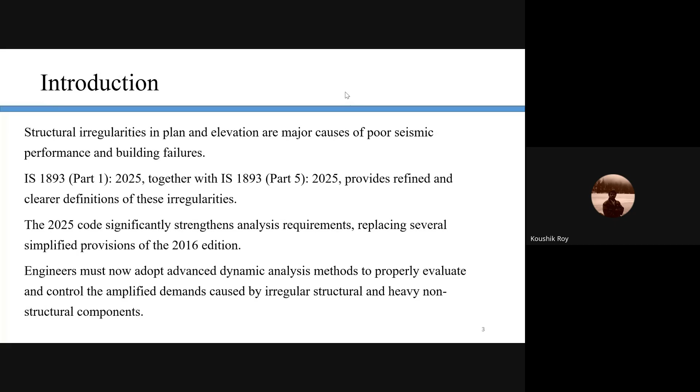But from top to bottom, if we consider the elevations, I just would like to know whether I am visible to all of you.

Some of you please confirm, because I'll be using some hand gestures that may also be relevant while I'm speaking. Dr. Rajana, you are visible? You are visible, my hand gesture is also visible, right? Yes, yes, yes. Okay, great, great. Thank you, thanks for confirming.

So this is it. We'll talk about this in detail in the next slides.

My opening remark was that IS 1893 Part 1 2025, together with IS 1893 Part 5, provides a refined and clearer definition of these irregularities. The recent 2025 code significantly strengthens the analysis requirements, replacing several simplified provisions of the 2016 version.

Since this is a faculty development program, I believe some of you are already involved in rigorous teaching of IS 1893, IS 13920, structural dynamics, or architectural design of structures. So if the 2002 or 2016 version of the code is already familiar to you, this lecture is a brief summary highlighting the recent changes, the reasons behind them, and their consequences for your final design.

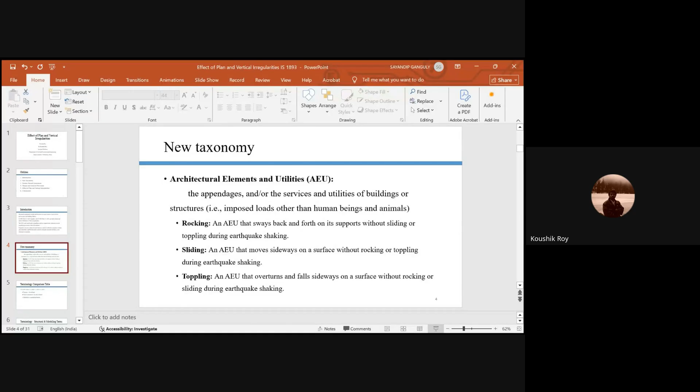Kaushikji, the slides are not visible. Sorry for the interruption. I don't know what happened, let me reshare it. Your presentation is starting. Yeah, it's now visible. Okay, I did not realize. Thank you very much. Please do let me know if there are any visual issues, sorry for the interruption, and audio issues at my end.

Okay, so this is architectural element and utilities. This is a term which comes up multiple times in the code.

The appendages are the services or utilities of a building or structure, that is the imposed load other than what is given by humans or other living beings walking, running, or whatever.

Rocking is one taxonomy. That is an architectural element and utility that sways back and forth on its support without sliding and toppling during earthquake shaking. Rocking is not a very new phenomenon, it's like the old wooden easy chair and how it actually works.

Although in structural engineering we don't deal with this terminology that much, whoever comes from a geotechnical background, this is a very common term to them in the context of lateral vibrations.

Then sliding - architectural elements and utilities that move sideways on a surface without rocking or toppling. Sliding, as the name suggests, is not a very big deal.

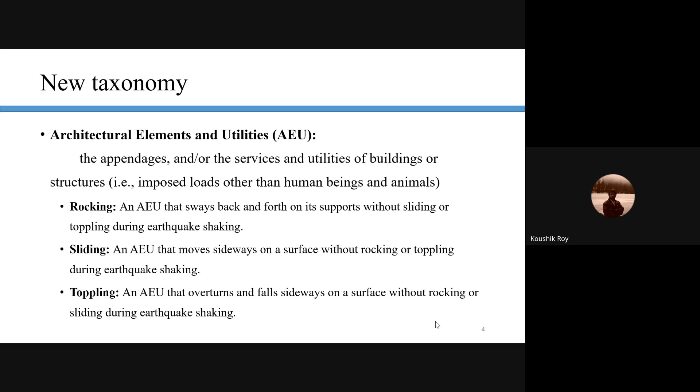These are shaking gestures, the shaking behavior a structure depicts under earthquake shaking. It can be either rocking or sliding. If there is no two, then it's toppling. Toppling is essentially failure, while rocking and sliding are still part of an analysis.

For terminology comparison, just note these things. The tick mark means this is there, but not defined properly. This is the sign I am going to use with it.

This is the sign that I'm going to use, which is present but not defined in detail.

Then the star symbol I'm going to use in the next slides - please keep this in mind, because rather than writing in remarks 'newly introduced' or 'not defined' and so on, that means it's been added. We call it addendum or corrigendum - something absent in the earlier version but present now.

There is also a formally defined term, which is in a very close form now. You can take the name and consider it strongly in the analysis.

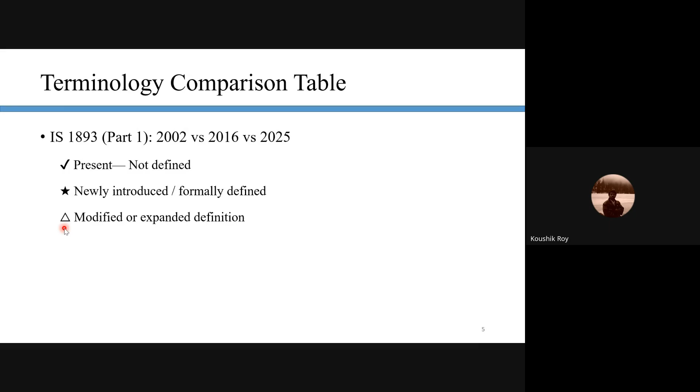Again, honestly speaking, in all these expanded and modified versions, I am still exploring. I am expecting some commentary from the proposed team members, in the form of commentary. So whatever I could unfold by going through the codal provisions, I'll only share that part. I may not be able to address all such concerns about what is modified and why it has been done.

So I was not a part of drafting these codal provisions. So it will take some time for me to learn this - it is just 2 weeks, and it usually takes a bit of time.

Anyway, that's why probably Dr. Rajaram has chosen this time frame. He can be one of the fast ones, where this kind of information is now being shared in the form of a faculty development program. You, Dr. Rajaram, isn't it?

Anyway, coming to the terminologies in detail, I have also kept the 2002 alongside. So bare frame and bare structures - what is bare frame. In the 2002 version it was kind of silent. In the 2016 version, the concept was there in the modeling, but it was more often dependent on the understanding of a designer or a designing firm.

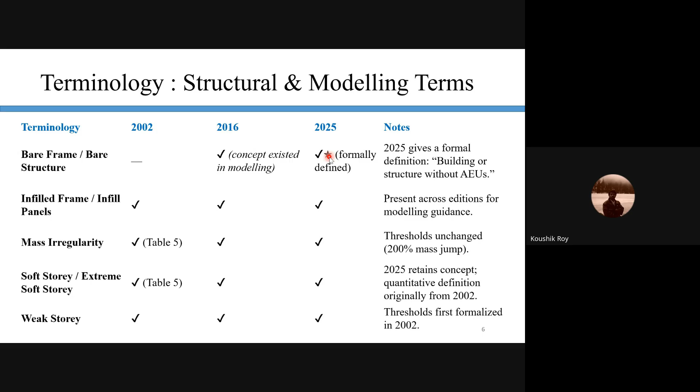Weak story - again this was there, this is there. Now soft story, weak story is very much related to your vertical irregularities. Then comes torsional irregularity.

Torsional irregularity, which would be available in table 4 - this again is the same. You probably know that we have a center of mass and the center of stiffness, and there's something called design accidental eccentricity, and something called design load. And based on that, a weak floor attracts more force, leading to high seismic demand in any structure.

Torsion is very dangerous actually. We follow a thumb rule, although it's not mentioned in the codal provisions. When we proof-check any building or structure, we try to check that the two principal directions of vibration are perpendicular to each other, and also that in the first two modes there shouldn't be any torsional mode. If there is a torsional mode, we need to revise our design so we don't get it in the first or second mode. From the third mode onwards, we usually allow a torsional mode, considering that the mass participation factor would not be very significant there.

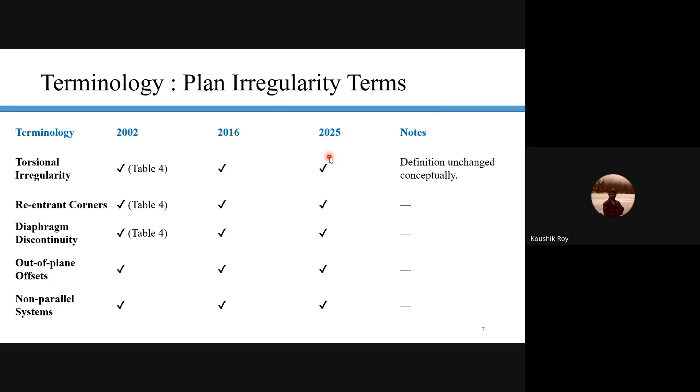Then coming to vertical geometrical irregularities, it remains the same - the threshold has been defined as 150%, 1.5 times, it remains unchanged. Then the in-plane discontinuity also remains unchanged. Then mass irregularities, that is kept the same.

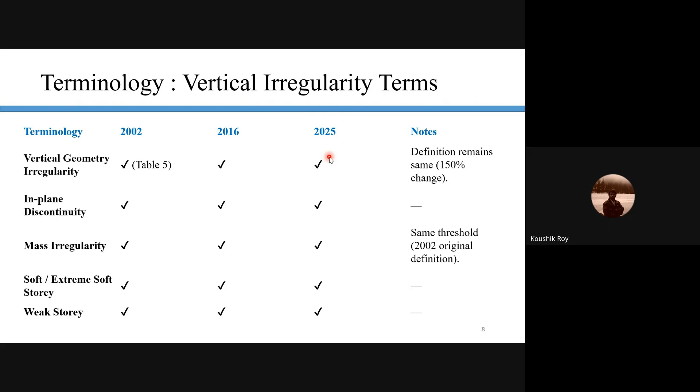Since the theme of the workshop is codal interpretations considering the recently revised codes, I thought let me make you familiar with different terminologies relevant to vertical and horizontal irregularities. So, done. Next is ground motion terminologies - mind this, so uniform hazard response spectrum.

Yeah, that is something very new. It's like next semester, as a part of our curriculum, we have earthquake resistant design of structures. So we are going to have a bit of a hard time decoding the code, which is just even not a month away for us being a teacher.

Anyway, uniform hazard response spectrum was already there in various standard textbooks and books on earthquake resistant design of structures or advanced RCC design, and it can be found in structural dynamics textbooks too. So this was not a very new terminology for us to calculate or analyze. However, the code was never very vocal on that part, even though we had been following it as part of our calculations. So for the first time they have acknowledged and introduced the uniform hazard response spectrum.

That is very important. And again, don't ask me what exactly uniform hazard spectrum is and how it is calculated. You are encouraged, you are requested to learn the terminologies on your own. It is already defined in the codes or any standard textbook.

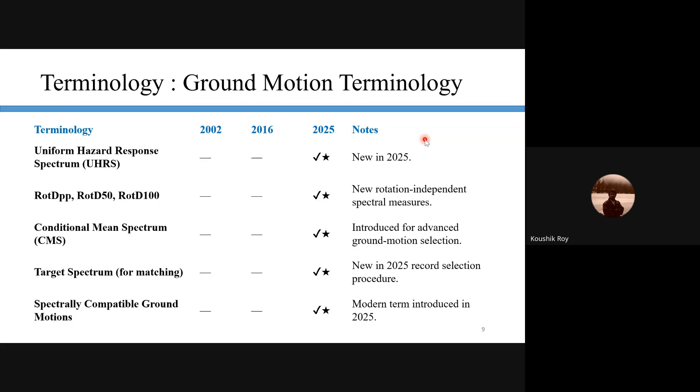This spectrally compatible ground motion is a new terminology, but I wouldn't say it wasn't there before. In research we had been considering that. But this is something new in the name of terminology in the code. I believe this spectrally compatible ground motion may not change much of the outcome, but I'm not sure. I haven't used these provisions yet in my design so far.

Coming to a few more terminologies, you may think the professor is teaching so many terms. I'm only focusing on those which are new, and within an hour or an hour fifteen, or say an hour thirty minutes, I won't be able to give detailed description on each part. That's why I'm just motivating you on what they are and why they've been introduced. Please excuse me on this.

In modal analysis, you had modal analysis earlier as well, but now a generalized coordinate and generalized concept of generalized mass have been introduced, and that has to be incorporated while doing the modal analysis. This was there in the beginning for modal analysis, but now it's been introduced formally.

Next is missing mass corrections. Missing mass correction was there - I don't remember if it was in 2002, but the 2016 version talked about it. However, it was not at all transparent or clear how to use it, or indeed whether you needed to use it. Now the 2025 version is very clear about imposing this correction factor considering the missing mass.

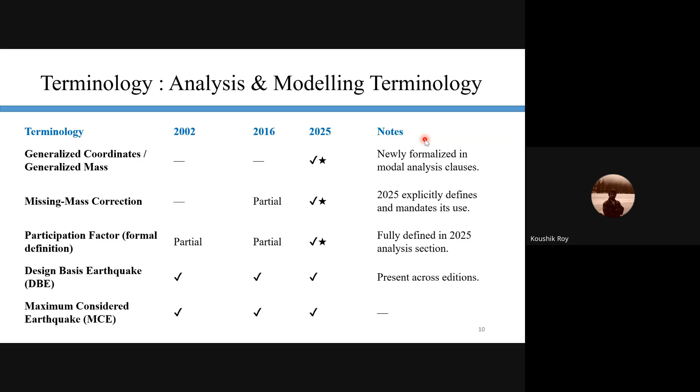Design basis earthquake was already there earlier, it is there, it will be there. Maximum considered earthquake - it is there, it will be there, it was already there.

Architectural elements and utilities are very basic terminologies I need to use multiple times in this context. AEU comprises three major categories. They have given a different classification for architectural elements and utilities. Earlier, this terminology was not at all there in the code. Now they have introduced this code, defined it, and their utilization is also very much defined.

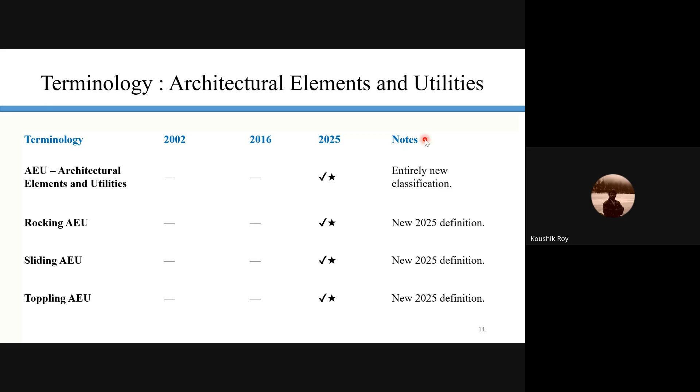Next is rocking - this is newly defined in the 2025 version. Next is sliding - earlier it was not there, but now it is. I have already discussed that. Toppling of AEU was again not there, but now it is. So these are the four newly introduced terminologies, along with their formal definitions and user guidance, which you cannot bypass while designing a structure.

Without this, any session today, even I'm not sure about the next presentations - Professor Pradeep Kumar, Professor Raghukant - any presentation or seminar in this FDP would be kind of not complete, I would say. So I mean, do I need to mention anything on that part, because this is not really relevant to my actual theme in this context.

But I just wanted to show you how differently things have changed. One important part to note - Delhi and Jaipur are now taken into zone 4, and that's notable because Delhi and Jaipur used to be in two different zones. Jaipur used to be at zone 2, whereas Delhi used to be at zone 4. Now, Delhi and Jaipur are in the same zone 4.

So whoever is coming from Jaipur, or if this is your area of interest - there are certain zones which got promoted not by one grade, but by more than two grades sometimes. Earlier, Darjeeling and Alipurduar used to be in zone 4. Now everything has been blanket kept in zone 6. So there is a promotion from zone 4 to zone 6 in various contexts.

And if you see the map, for the seismic hazard analysis, they told that it's a probabilistic seismic hazard line. Just note that it doesn't look like that - actually they bent that line in a way so they could cover Delhi and Jaipur together.

How many of you feel so? Isn't it - there are certain regions where decisions are not always technical. My professors used to say at IIT Roorkee that there are certain regions which are political as well. So they always wanted to put Delhi and NCR in the very highly seismic or high risk zone. Anyway, that is not aligned with my theme of this presentation. I just wanted to show you this, although my previous speakers and future speakers succeeding me today or next day will probably come up with this slide to discuss more on this part. But again, this is not my part to speak on.

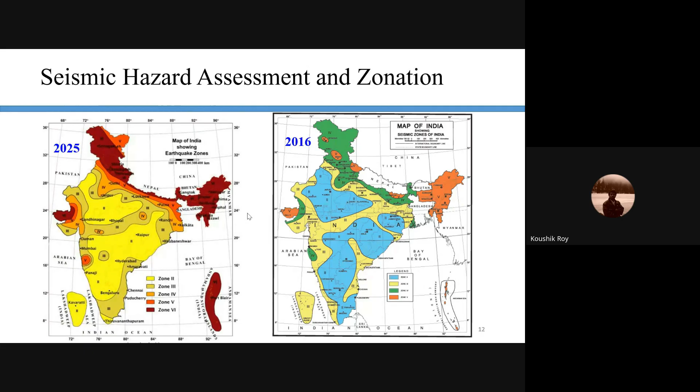In fact, all major cities are now coming into this highly seismic zone - be it Shimla, Dehradun, Roorkee, Chandigarh - everything is now coming under this region. Earlier this was not the case; we had a certain level where we were using zone 4 at the time.

Anyway, moving to the next - zone boundaries. As I was telling, it has been adopted as a higher-risk zone if there is any boundary of the city.

Return periods actually specify the design horizontal acceleration coefficients for each earthquake zone corresponding to different return periods. Zone 2 now corresponds to 2475 years of return period. We follow a Poisson distribution in this context, so I'm not going into 10% probability of exceedance, 2% probability of exceedance, and so on.

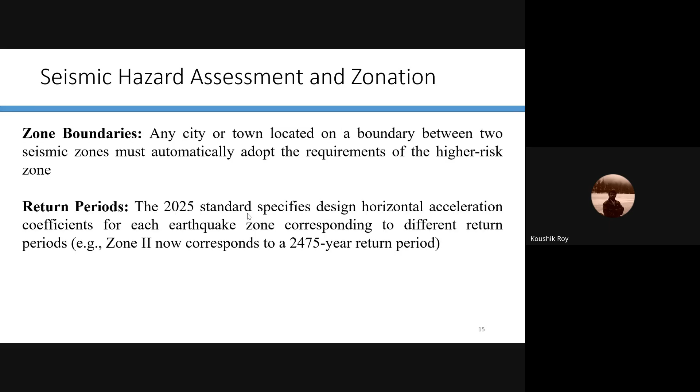This concept you already know, in 50 years that means 475, 2475. If there is a 2% probability of exceedance or 10% probability of exceedance, then it will correspond to different return periods - following Poisson's distribution.

Code structures, this newly devised one, are divided into different segments. Specific building provisions are also given in detail in the newly revised standards. Non-structural safety components are also introduced.

The major focus was given to non-structural components - be it facades, false ceilings, parapet walls, isolation walls, separation walls, water tanks. Special emphasis has been given to this.

So this has to be considered and anchored if the weight of all such non-structural components exceeds 1% of the entire floor load.

I'm still confused whether the floor load includes the dead load of the floor or not. Probably not, but this is still not clear to me, honestly speaking, so I cannot give clarity on the matter - whether it excludes or includes the dead load of the floor. That's why I've highlighted this part in blue, because I need to explore it more.

As I told you, I really did not get much time - it's not my fault, because the code only got revised a couple of weeks back. I'm still waiting for more observations from other experts. When I present next time, after a couple of months, I will try to enrich myself enough to address all such concerns and connect all the missing links I'm still struggling to find, with good explanations.

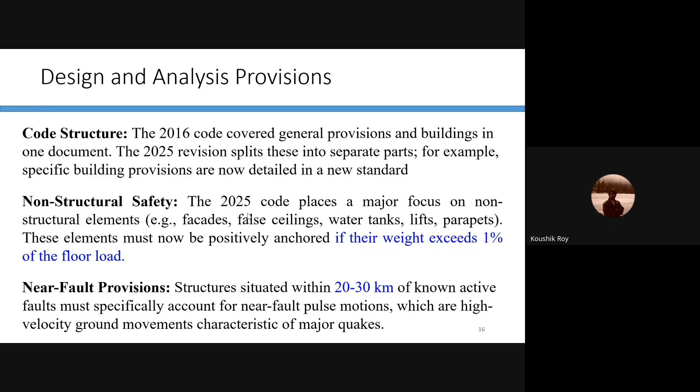Soil considerations. In case of soil considerations, see, I'm a structural engineer although I work on soil structure interactions. As I see the panel already, Dr. Mohanty will be there from IIT BHU to talk on the liquefaction part. Liquefaction was already introduced in this structure in the earlier 2016 code, but believe me, that was very hazy. There's a lot of equations, and even the units are very different—foot per second square, meter square, pound per feet square, kilometer per meter square—all the units. There are a lot of confusions actually.

I remember when I was teaching this for the first time as part of my course, seismic design of structures, in 2022 sometime during the lockdown, I also felt these hardships while teaching that part. Now I believe these new codal provisions have made it more detailed. As I told you, these codal provisions are a bit complicated to follow than the earlier versions, because this is no more a very simplified one, unless you have an expertise on structural dynamics.

Some of the provisions, some of the clauses, are really hard to follow. I mean, again, my opinion, but I believe that will be the opinion of others as well. So before following this code, if you have a good understanding of what is soil flexibility, what is its contribution in structural vibrations, what is liquefaction phenomena, and all the technical terminologies associated with that, if you are familiar with them, then you would not face much hard time to follow these codal provisions. Anyway, soil condition was already there.

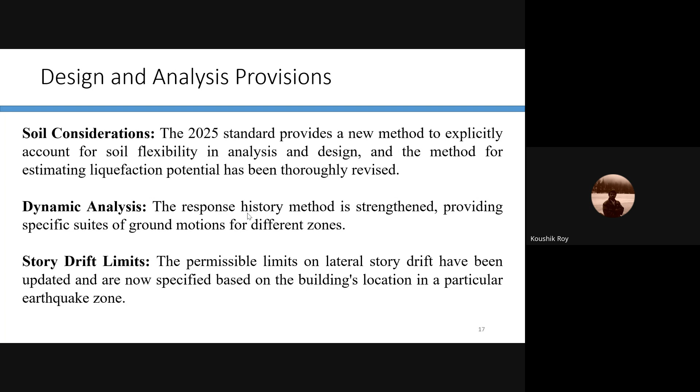On story drift, earlier it was very blanket, but now for every zone the limit has been defined. The maximum elastic value from elastic analysis was given as 0.4% of the story height, which can be used as the minimum specified design lateral force.

Now it is very much zone dependent and has been made more conservative, more strict. If you are more strict on the story drift part, your sections need to be much higher to meet the seismic demand. Your structure would experience more inelastic demand, more ductile demand, so to compensate you may come up with higher sections and higher reinforcement, adding a heavy load from the economical point of view.

In fact, that is probably one of the reasons.

My slides are visible, Dr. Rajaram? Yes sir, it is visible. Okay, thank you. I just wanted to check.

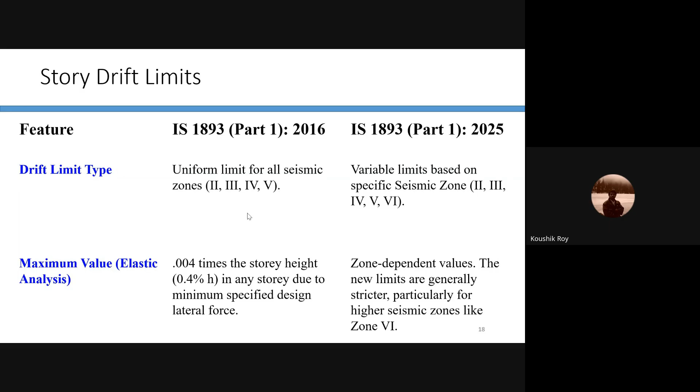Since it is now zone dependent, it will put some pressure on the economy, so that is one of the reasons. I'm not sure whether this can be on record, but I heard that the industry put a lot of pressure to make it simpler or less strict. Anyway, I'm happy to see that our voices were considered.

Coming to the applicability point of view, the 2016 version was generally applied to all regular structures. However, in this part non-structural component safety has been focused on, with a strict limit on irregularities and specific non-structural components.

Sometimes a structure may not be that vulnerable, your structure may be sound and safe, but irregular installations like water tanks, heavy machineries, or a mumty room can be a problem. A 1,000 liter water tank is a very heavy load on top, and you can imagine what kind of eccentricity it creates during a seismic event. Even facades may look like lighter structures, but heavy machinery installations like a mumty room on top of a lift well, or AC control units, are all part of this.

So all these are non-structural components, and a lot of architectural things are actually considered into account now.

I'm happy that at least now we can show our architects these provisions we need to follow, and we cannot do anything about that. Otherwise, the fight between the structural and architectural engineer was inevitable, and we were kind of helpless because of their beautiful presentations, and clients were happy with them, while we structural engineers had to convince the client multiple times about what is safe and what is not, and we were struggling.

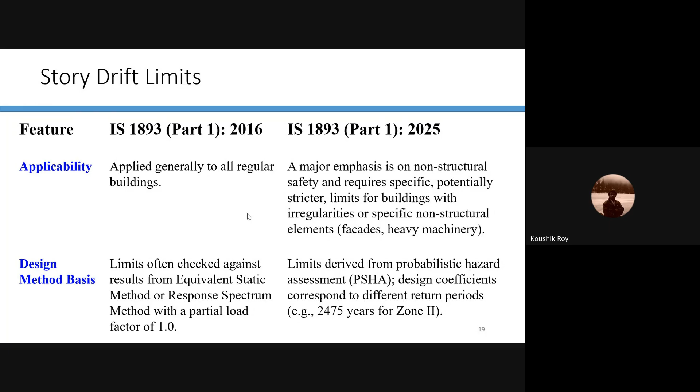Design method basis: in the response spectrum method, we were not using much of the partial load factor, which is one. Instead, limits derived from probabilistic hazard assessments have been introduced, with coefficients proposed for different return periods of an earthquake. So design methods also got changed.

This is something I'm actually talking about. You have a center of mass, CM, and center of stiffness, CS. We also call it center of resistance, or CR, in codal provisions and some books. So your inertia force during a seismic event or any lateral load acts through the center of mass, because it's m times x double dot. So wherever there is mass, the x double dot will act at that location as the center of mass.

However, the structure has static load resistance capacity, and we know the source of that resistance comes from the stiffness of the structure, because during our BTech time, we established the relation between stiffness and force to come up with deflection. That's it. In this case also, the center of stiffness is the center of resistance of the structure.

If the load is acting through the center of mass, and the resistance is acting at the center of stiffness, then the typical rotation would be somewhere in between. So what happens? There will be some torsional force, torsional moments, and because of these torsional moments, the weaker sections, due to high rotations, would end up having high seismic demand, leading to high seismic loads in each of the structural components, and your seismic demand is going to increase a lot.

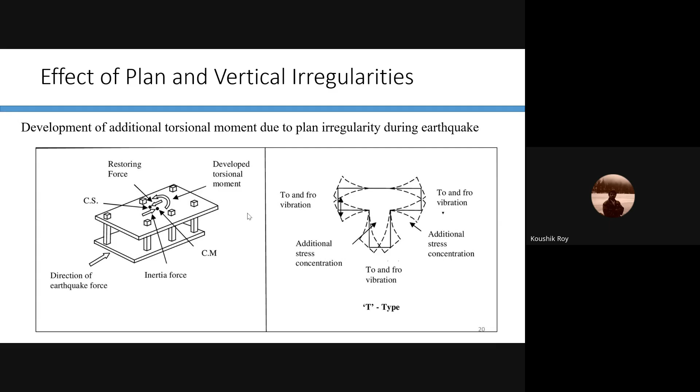But here, because of these to-and-fro vibrations, different components will vibrate in a different manner, ending up creating some hot spots of failure. So where the failure would be, the structure will be more vulnerable.

Additional stresses develop in buildings having plan irregularities during earthquakes, so some stress concentration. If there is an L-shaped structure, then because of the to-and-fro vibrations, the corner will have more stress concentration, as you already know.

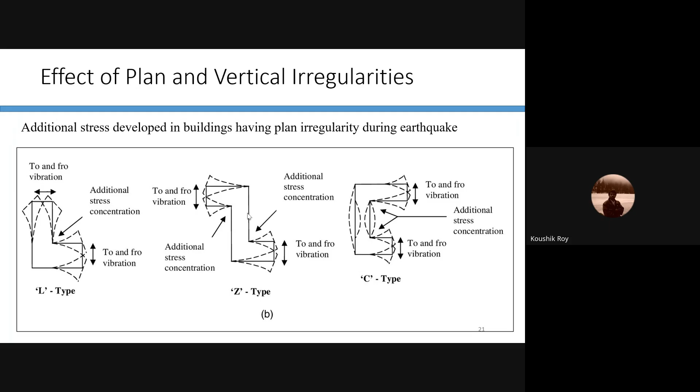In case of Z-type structures, and also in case of C-type structures, this is the mode of vibration, and there will be additional stress concentrations resulting in seismic demand at its corners. That's all about the horizontal irregularities.

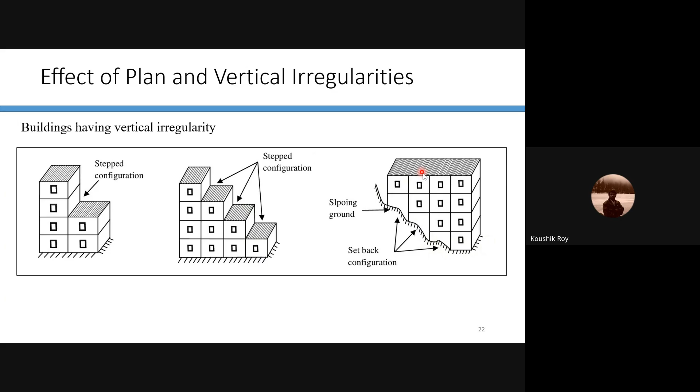Vertical irregularities in buildings arise due to variations in story stiffness. This is quite common, not very new - it was there in the 2002 code version as well, during our student life, so we had been learning these things. The story stiffness cannot be less than 80% of its neighboring floor's stiffness, adjacent to that floor. So yeah, this is something we need to consider regarding vertical irregularities.

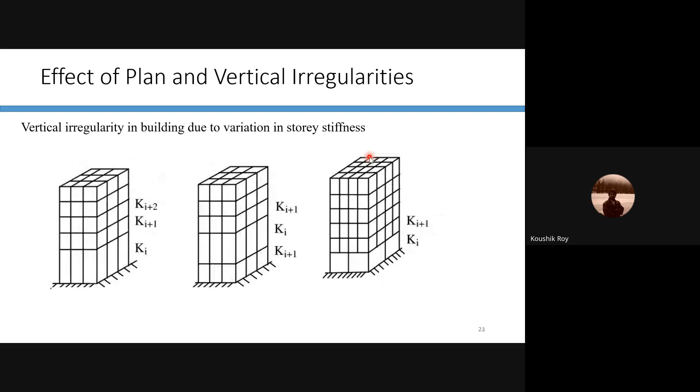Sometimes the DG sets and similar things are mounted on top of a building. Sometimes it can be a water tank or other heavy installations, maybe the AC unit of the central HVAC system. So top floors are typically made heavy in most residential and commercial buildings. These non-structural components are taken into consideration in the recently revised code, but these are major concerns.

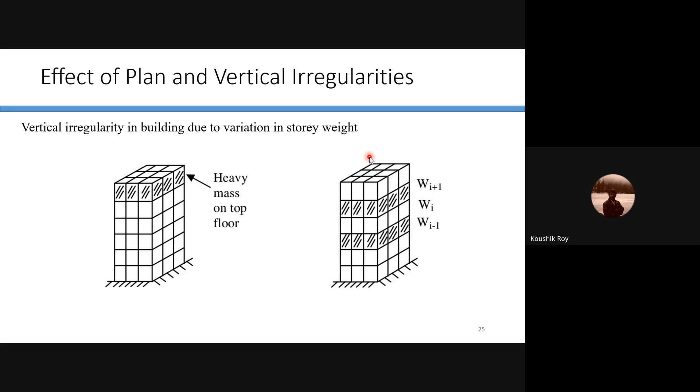On top of that, some intermediate story mass can also be quite high. So for that purpose, because of that, the vertical irregularities come in, leading to very high, unwanted seismic demand.

Now, effect of plan and vertical irregularities considering 2025 and 2016 versions. Earlier there was clause 7.1 and 4 and 5 for the plan and vertical irregularities respectively. The provisions are now split into the general Part 1 and the new Part 5 of 2025. So there are two codes now. The entire provisions of vertical and horizontal irregularities are given in two different parts, Part 1 and Part 5. Please read Part 1 in conjunction with Part 5 to get the complete picture of such changes or revisions. Now coming to the

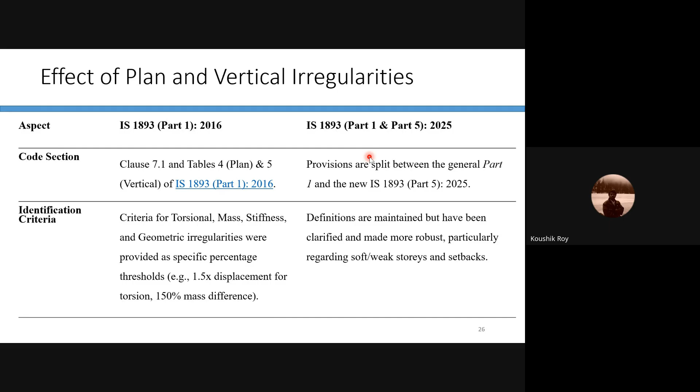identification criteria. We know it - torsion, mass, stiffness, geometric irregularities - that was already there, and we considered, for a specific percentage threshold, 1.5 times of the displacement for torsion. But the definitions, though kept the same, are clarified and made more clear and more robust, especially when to consider soft story and weak story, and in case of setback buildings, as I talked about the vertical irregularities in the previous slides.

Some mandatory analysis is now introduced. Earlier, for irregular buildings, it was recommended to perform response spectrum analysis, but it was kept as something that sometimes may be performed, kind of optional. Not exactly optional, but it should be performed, yet there was no clarity as such on that matter.

But now the response spectrum method has been strengthened, providing specific suites of ground motions - far field ground motions, and for near fault ground motions something specific. Just note that for zone 4, zone 5 and zone 6, these are mostly near fault ground motions, because the fault line is not far from that place, from the site. So now it is very specific - for all zones it is made for far field, but for zone 6 it is near fault earthquake.

So these ground motions are to be considered for the torsional, vertical or horizontal irregularities.

Now this torsional irregularity - earlier it was kept at 1.5 times. Now the mode participation factors can meet the specific threshold requirements, which is 65% for the first three modes. More emphasis is given on floor rotations. This is very important and will capture the entire phenomena as a more accurate measure, as I told you already.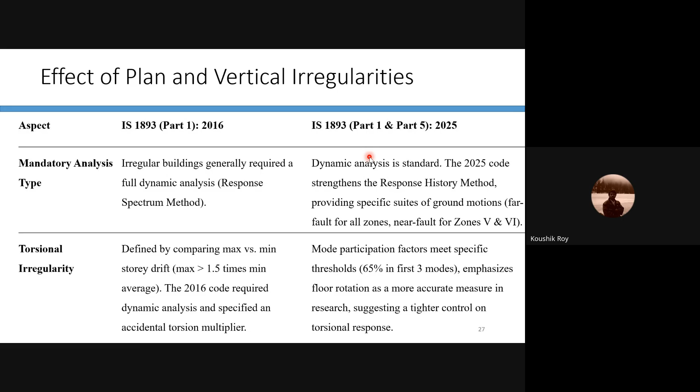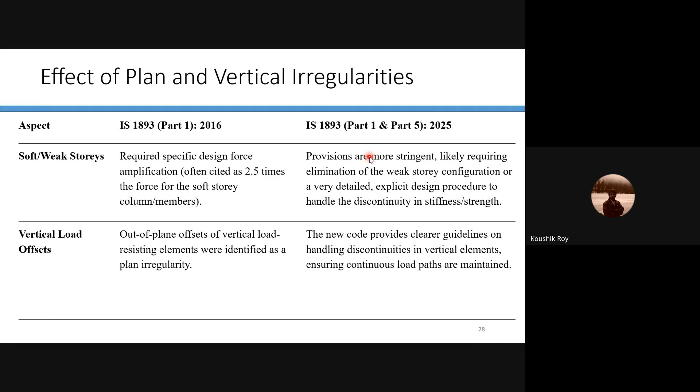Next up, we have vertical load offsets. These out-of-plane offsets were already identified as plan irregularities and out irregularities. The new codal provisions give clear guidelines on handling discontinuities in vertical elements, ensuring continuous load paths are maintained. Earlier, of course, in any standard design software, this was being incorporated - something which was not explicitly mentioned but still being followed by the designer. But this is now more explicit.

Coming to the mass participation factor change - amendment number 2 of the 2016 version, which came later, after the publication of the code, in 2018 or 2019 probably, sometime before the lockdown, I hope.

So they introduce specific checks for lateral irregularity based on whether the first three modes achieve 65% of the mass participation. This is irrespective of the zones, but the lower zone and the other zones—zone 2 and zone 3 have some rules, and zone 4 and zone 5 have different rules, out of zones 2, 3, 4, 5.

Now these mode factors are kept central to determining if the building can use simpler analysis methods or require more complex modeling across all the new zones.

In the newer versions, it was made a bit more simplified, which practicing engineers will be happy to see, because now the mass participation factor for the first three modes has been made more generalized. It is no longer zone specific—so for zones 2 to 6, it is made simple and uniform.

Now, regarding non-structural components—as I told you, earlier there was no such detailed treatment, just some figure left as is without further description or analysis. But in these new provisions, major focus is given to non-structural components, be it a facade, false ceiling, heavy machinery, or other installations in the main building. If those are heavier than 1% of the total floor load, you need to consider this in your analysis and anchor them.

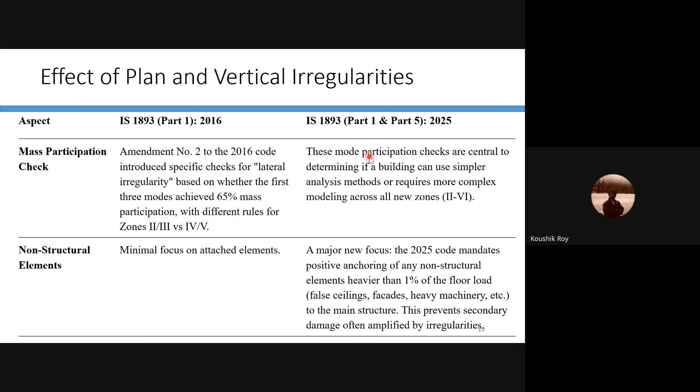So, coming to the closure—what it is actually saying is it gives some risk-informed analysis requirements. The uniform, one-size-fits-all approach is now minimized. I wouldn't say it's not there, but it's minimized. You'll hardly find specific equations applicable for every zone. So zone-based rigor is maintained, mandating dynamic analysis based on seismic zone severity, including the newly added zone—the highest point, zone 6.

Holistic safety of structural and non-structural components is considered, as I just talked about. So I am at the end of the lecture—this is the very last slide. And there are sharper and unambiguous definitions. Earlier, things were kind of left to the designer to an extent.

Time history analysis—sorry, 'analysis may be performed'—now these are very clear, very stringent, very strict: this has to be done. There is no ambiguous statement used in the recently revised code. The code is thrice more enriched than its immediate earlier version.

And again, thanks to Dr. Rajaram and the administration of his university that they could come up with such a topic on the very second or third week of the introduction of the codal provisions. Yeah, this posed some hardships for resource persons like us—the code was in draft mode and nobody was considering it. But suddenly it came into existence, and to prepare ourselves, we needed to go through everything as much as possible, and to come up with new information for you guys.